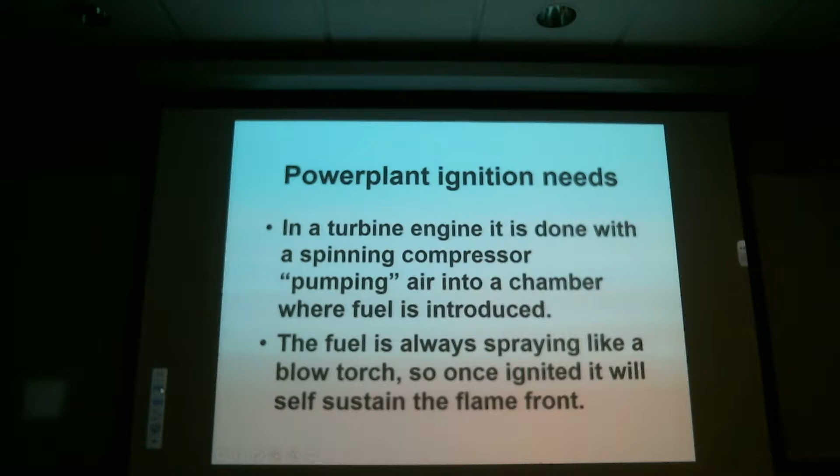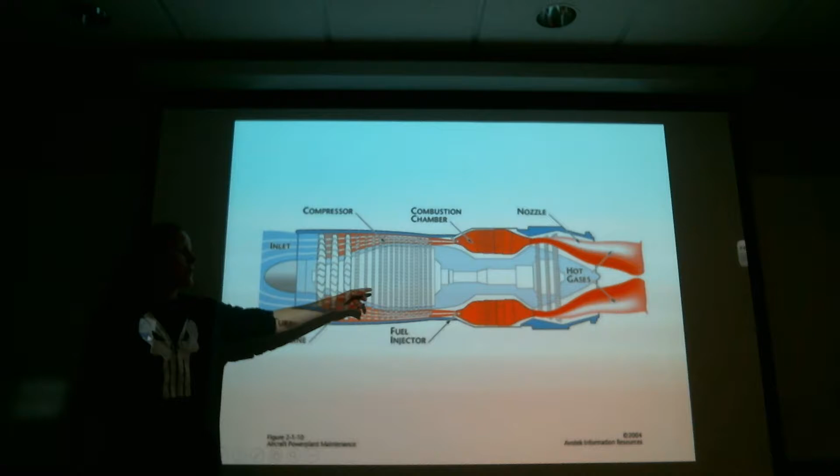Okay, ready for the next slide? Here's a picture of what we're talking about. So the compressor, what is this little guy here? What are these little guys called? Combustion chambers. So fuel injectors right here, dipping right into the combustion chamber, just like my buddy over here said before break.

So it works a little different than a recip. Obviously, there isn't valves, pistons going up and down. So everybody kind of understand and see what that is?

I think this is in the... there's a picture of this also in the power plant book. This exact picture. I know these are pictures taken from a 2004 book, but I believe they're still in the newer ones. I actually have a newer book that I've seen it in.

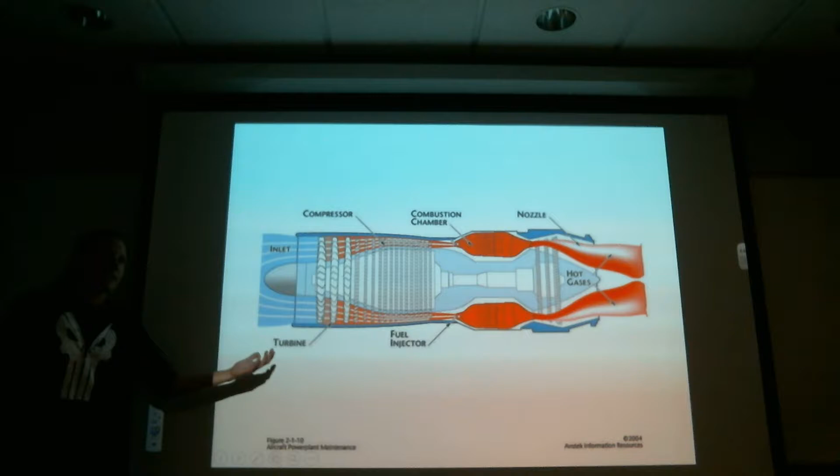And you guys will learn a lot more about turbines, obviously, in turbines class. But the main thing we're going to be talking about in this class is the igniter. So when we go through igniters and when we do those, we're usually involving turbines.

Okay? So for this class, what book would you prefer? What book would you recommend for this class? The new one or the old one?

I have to recommend the new one because that's the book that's out. I do like that green power plant book. I don't know the Glencoe one, that's older. I have the newer one here. It has just as much information, but when I'm talking about the older books, I'm talking about the AC 43.13 and stuff—they've changed those over the years. So if you have your old one from General, keep it, it's like a gold mine. That's what I'm reading from for this one.

Yeah, so the old ones are online too. But I also like having—I like touching stuff. So this is the one I'm going to be referencing in this class. And like I said, it wouldn't hurt you guys to read the ignitions part of this book. Is that one available in the bookstore? I saw it this morning, so it's available in the bookstore and online, I believe. It's cheaper on Amazon, or there's an online copy—way cheaper off the FAA site.

And I think, for the record, for what college books cost, these are nothing. I about flipped—I almost had a heart attack when I saw I had like 6 books to get for General. I was almost crying because I was on a budget, and all my books from other classes cost like $100 apiece. I can't afford $500-600. When I went to the store they said it's under $100 for all these books. So instruction manuals aren't that expensive, but they're very useful.

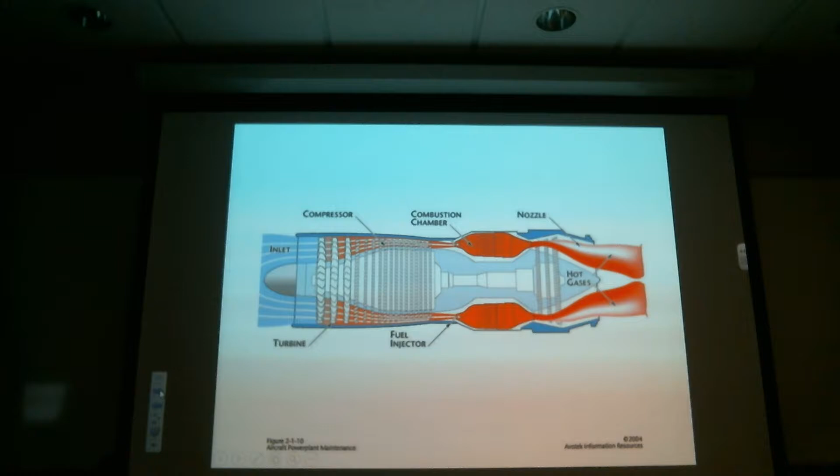So if you don't have this book, please get one. He said they're in the bookstore, and you can also get it online. Kennedy over there said so. So if it's not there—it was there at 8 o'clock this morning. Oh, now you're sliding the time, huh? Yes, when I was there. You gotta check the top shelf and the bottom shelf—there's two locations, a used location and a newer location.

In every aircraft engine, the spark must spark consistently every time when needed. So basically, it's got to work—it's got to give you the spark when you need it. What happens if it doesn't, and it's late? Does it just blow up on you or something? That's one of the things we'll talk about.

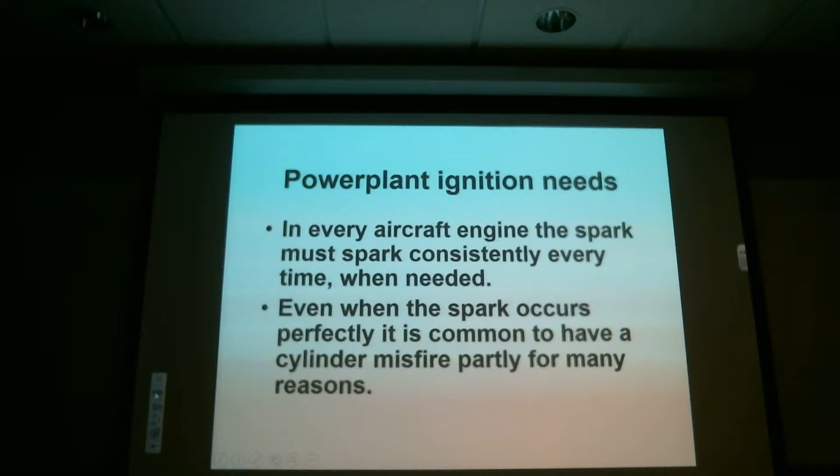Is it that we hear knocking because it becomes uneven or something? Yeah, so we'll go through detonation and pre-ignition, which are common factors if the timing is off. We're gonna talk about Pauli's magic angle—some of you said you knew what that is, right? We're gonna go through it anyway, but it's important for it to happen at that time. If it doesn't, these are some of the things that can happen, and knocking noise is one of them you'll hear. I'll show you pictures of what could happen.

Here's a good one right here. Even when the spark occurs perfectly, it is common to have a cylinder misfire, partly for many reasons, and we'll discuss those reasons. It's not like 100 reasons, but...

When you guys go into recips, you're gonna be right on top of it. You're gonna tell Lonnie, 'I don't need that stuff, I've already seen it.' I don't recommend doing that—I wouldn't either. He doesn't like it when students say they already know everything. Trust me, he'll find something you don't know.

So my guys that have had recips, what are some of the reasons it could misfire? Wrong fuel—I hope you don't have the wrong fuel in there. Pre-ignition, detonation. What about a foul spark plug? Yeah, if it's a foul spark plug it won't ignite, or if the timing's off, or if it's overheated, it could detonate.

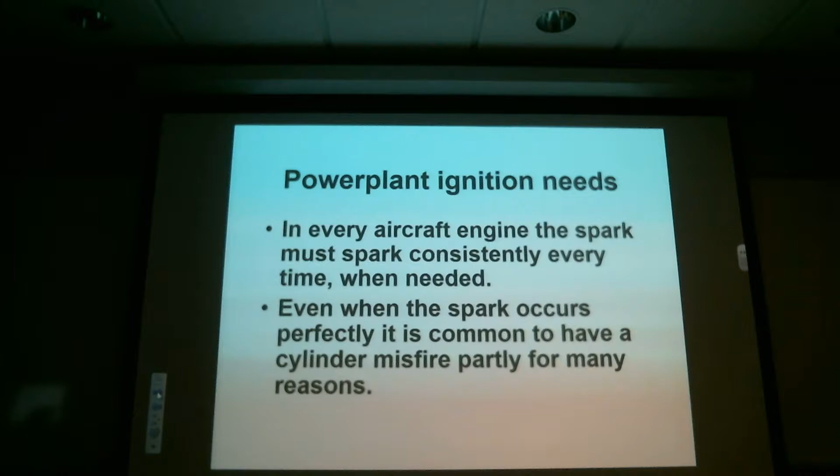Everybody kind of see that? I know it's kind of hard to visualize, but as we go through the slides, you'll get a little bit more.

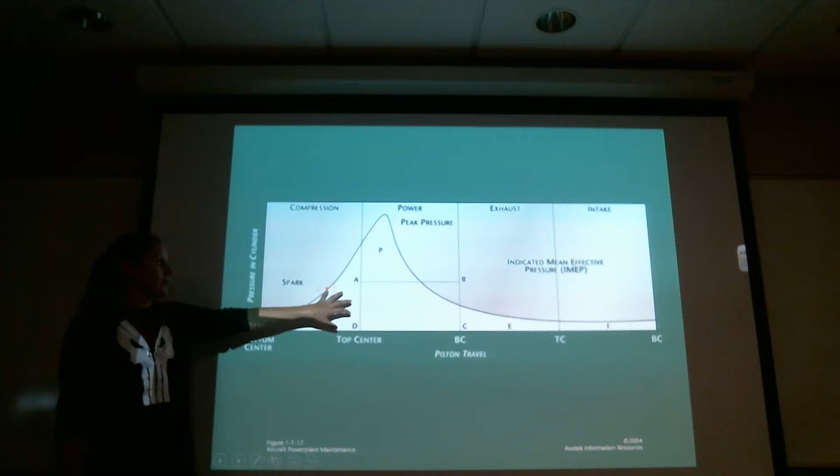So the reason why we want the spark to happen 15 degrees before top dead center - someone figured out that's when it needs to occur in these engines. They realized it's going to take time for it to get up to top dead center. Everything's moving, so you have to give it time to travel there because you want it at its peak pressure before it pushes the piston back down.

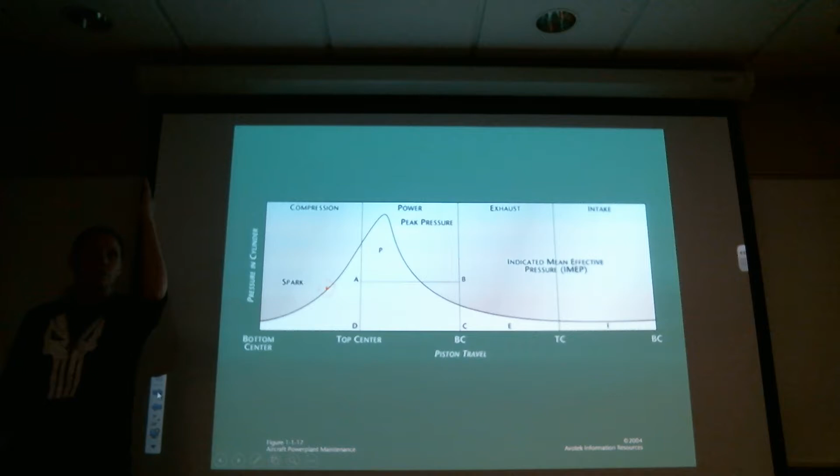And we don't want it completely at top dead center, because if you're straight up and down and I give you the most power, what's going to happen? Snap the piston rod - it's going to bend. It's not going to do anything, it's going to hit it just like hitting it down with a hammer. But when you're kind of bent like this, it's going to push it and make the rotation go around. I'll have pictures showing that.

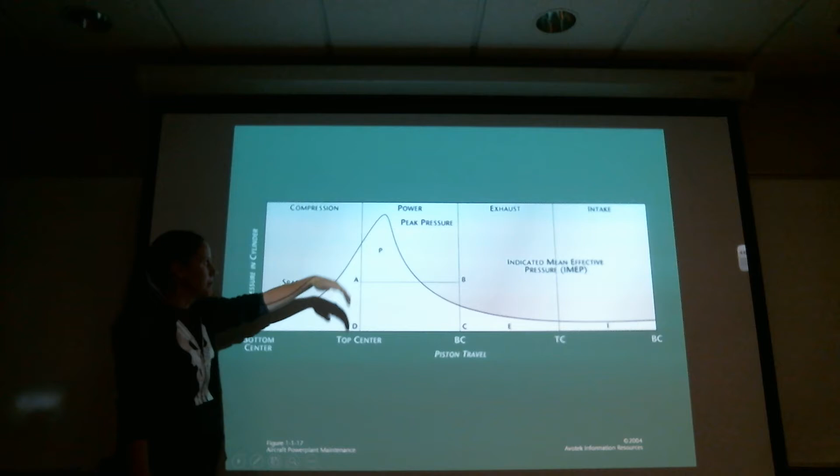This is a diagram. So when you see this in any other class, the spark comes here because it's 15 degrees before top dead center. And then also your peak of pressure happens some degrees after top dead center. The peak pressure is supposed to be like, what, 7 degrees after top dead center? Something like that.

After when is peak pressure supposed to happen - the exact degrees of crankshaft rotation? Well, it depends on the engine, but most of the time it's 25 degrees after top dead center.

You're talking about the little rod, right? The connecting rod - that's connected to the piston. So the piston's straight up and down, we don't want to ignite it right there. We don't want to hit it so pressure... you ignite it at 15 degrees, so you're going to spark at 15 degrees because the peak of pressure is going to be up here.

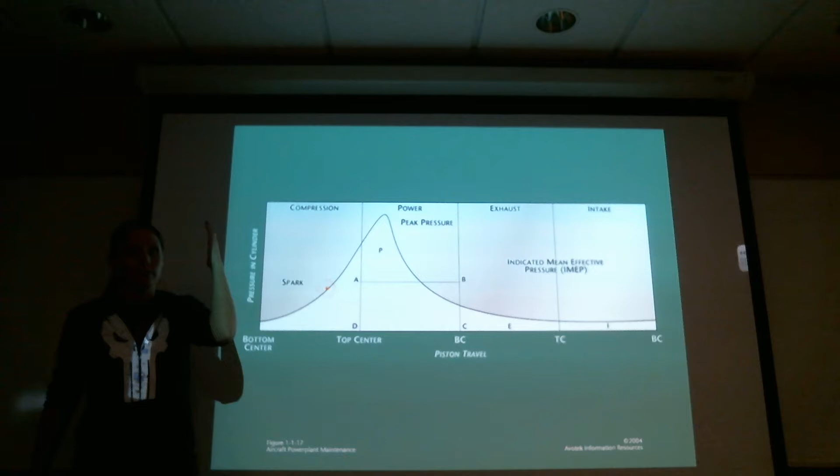So the piston's already going to go past top dead center. So if our peak of pressure was here and the ignition happened right up here, it's going to hit straight down. There's nothing it's going to go against - it's just going to take all the force. And sometimes it'll bend the connecting rod.

I actually have a picture of that. There's plenty of things it does to the piston, but I never see pictures of what it does to the connecting rod. I don't know why people don't show pictures of that. The one I think I have is actually from a car, believe it or not.

Okay, so the engine also needs sparking to occur differently at different times. RPM is the most significant factor on when to spark the fuel air. In an airplane, we're usually running close to the same RPMs all the time. In cars, you may adjust the timing, but for airplanes we're usually running at the same RPM, so we don't have to adjust timing - it's always that 15 degrees before top dead center for most engines.

Okay, so let me know when you have that written down. Everybody have that down? If you don't, please speak up, I'll wait for you. Okay, so bottom one.

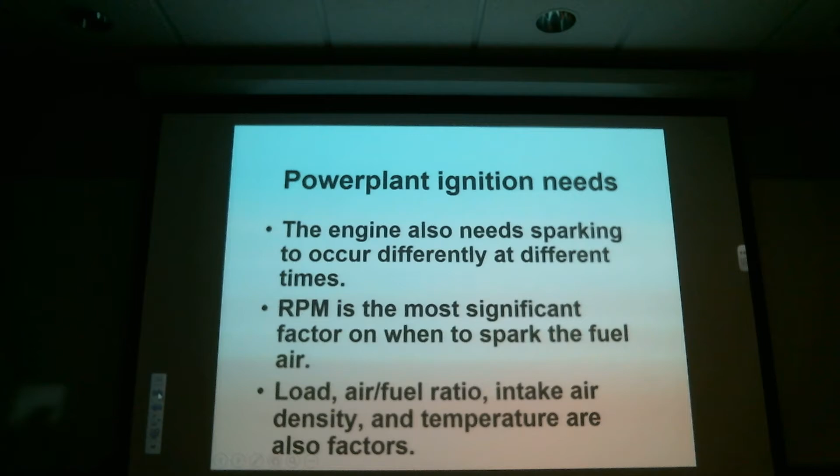And all this stuff we're going to continuously talk about throughout the course of the class. I'm hoping everybody was done because I just went to the next slide.

Okay, the rate of fuel burning stays fairly constant, about 200 feet per second. Your reciprocating engine needs to have the maximum average pressure occur at 15 degrees after top dead center - sorry, it's 15, not 25, I apologize. 200 feet per second.

But I do like that 7 number. I haven't heard 7 - I think it was in reference to like American V8s.

Muscle car. And when I think of 25 degrees after top dead center, I'm also thinking about the bigger engines, because the piston is bigger.

So the bigger ones, the bigger the piston diameter, the further degrees are going to be passed. Because 25 degrees after top dead center is something that sticks in my head. 15 is not usually.

Is that 200 feet per second? Yes.

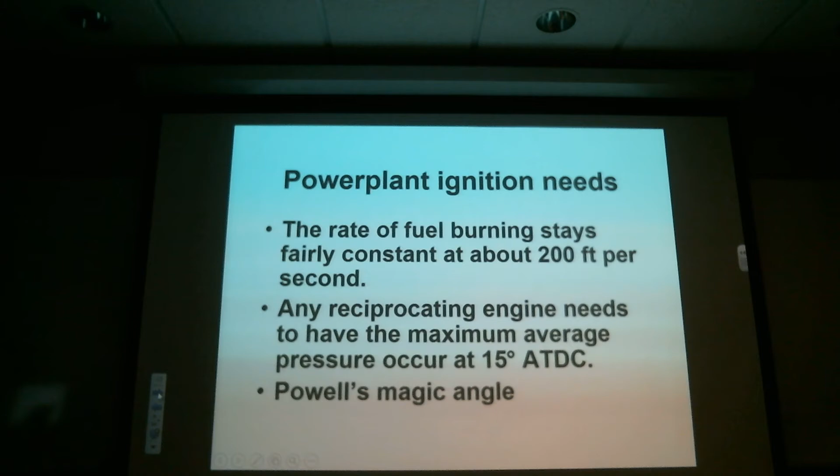Yep, everybody got that? Powell's magic angle. This guy's name was Powell. Okay, so here's another picture of it.

So what do we say, 15 degrees after top dead center is when it's going to happen. So most of the time the spark, I'm thinking the opposite, the spark would be 25 degrees before top dead center. So 25, 15.

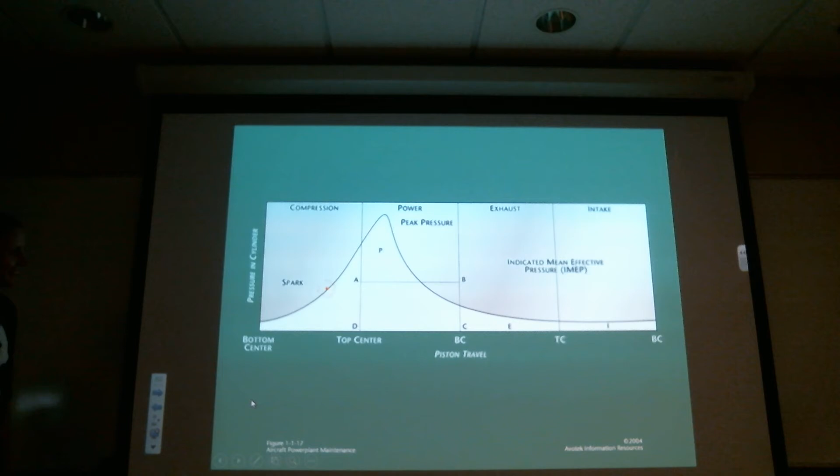And here I was just telling you guys that numbers was my thing. Right, numbers on your... yeah, numbers just not. Yeah, I knew it was somebody's birthday, I just didn't know it was your birthday.

So same thing I was talking about before. Spark happens here, top dead center. Peak of pressure is going to be up here. That's going to be our magic angle.

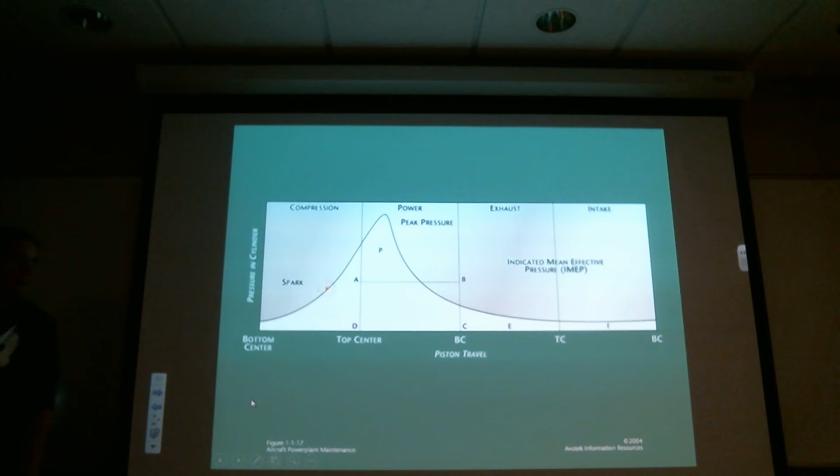Like I said, the reason why it happens here and not directly here is we got to factor in the engine's turning. It's got to give itself time. This thing happens instantly, it's quick.

It's really, really fast. It may seem slow looking at it at this point, but they're slowing it down for you. This happens within milliseconds.

Also, the reason why you have to start it so far in advance is because you have to wait for the flame front to travel from the spark plug and then eventually reach peak cylinder pressure.

Right, and so in the bigger ones, we have 2 spark plugs in there, right? So part of the reason we have 2 spark plugs is for redundancy, but also for bigger cylinders it's so they both fire and can get the flame there quicker.

Yeah, because if you only had one spark plug in a 6 or 7 inch diameter piston or bigger, the flame front can't travel to the other side of the cylinder fast enough to actually make peak cylinder pressure. It's just inefficient as all get out.

Did you guys all hear that? You guys look really live. We're gonna take lunch here very shortly, I promise.

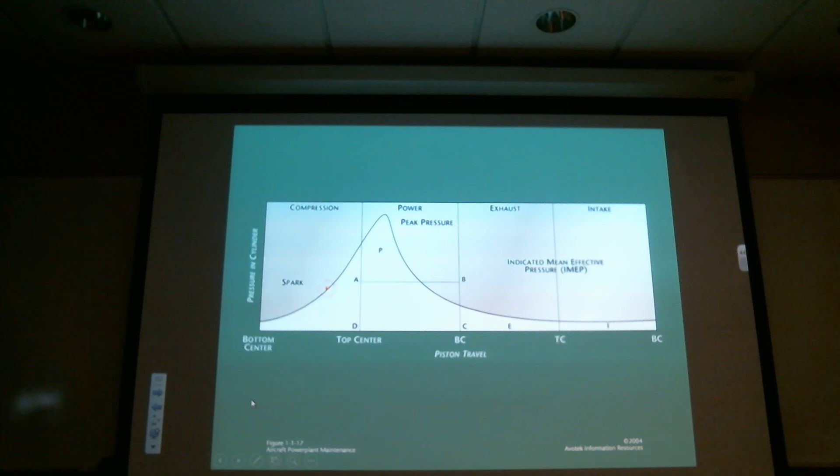And now 1 minute past here. But I kind of want to get a little bit further into the slides because I still have 20 more slides to go before I put you guys in lab. So we're probably only going to spend, if we spend any time in lab, a short amount of time.

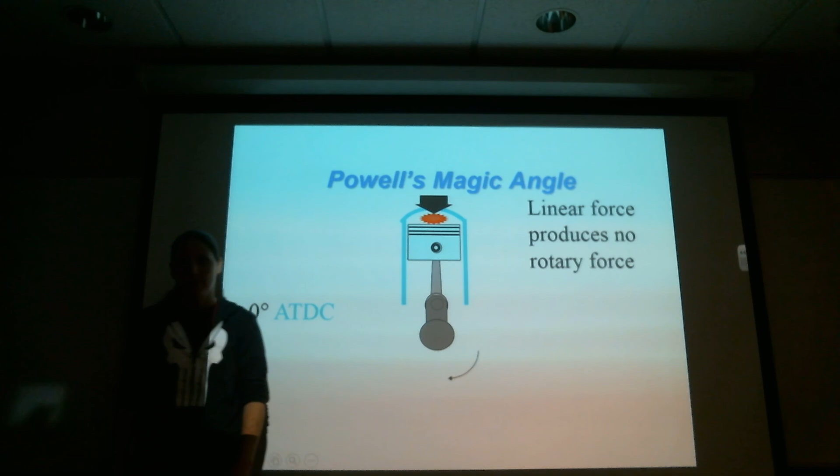It's kind of a visual aid here. So does everybody kind of see that?

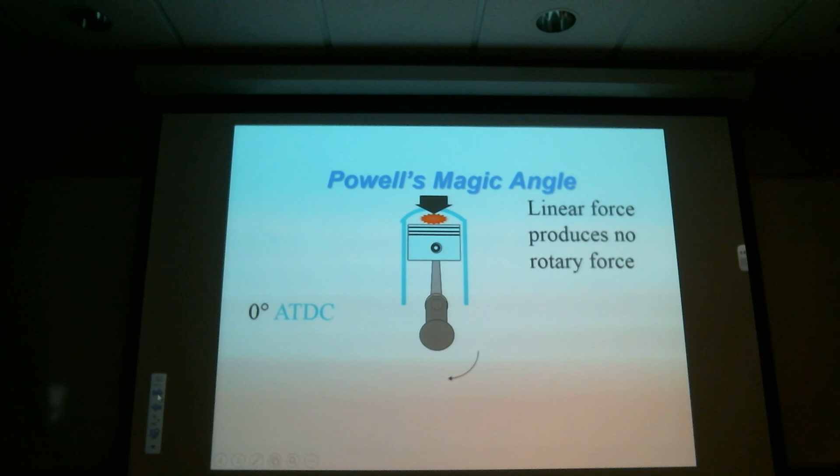Everybody get down what they wanted off that slide?

So now you're visually seeing it. So now we got a little bend in here, right?

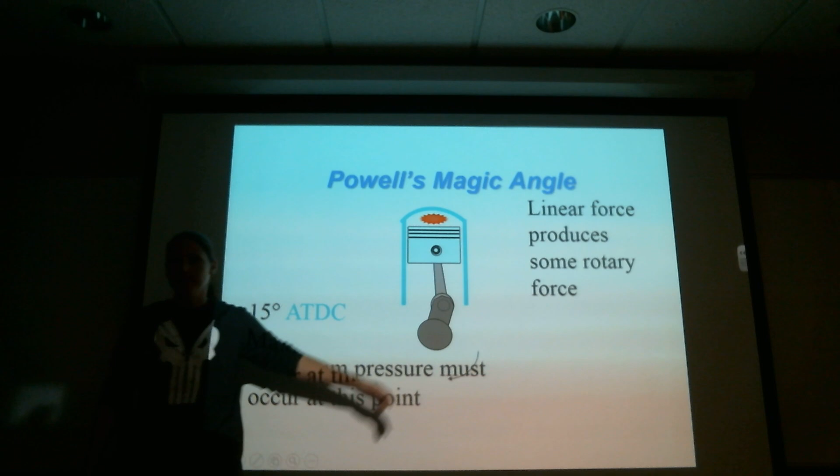So maximum pressure must occur at this point. Like I said, it was discovered a long time ago on this particular angle.

Who discovered it? Powell did with his buddies. They figured if it happens at this point, it will give me the maximum pressure I need to make it spin all the way around, the most efficient I can make the engine.

Does everybody get that? It's pretty easy when you start visually seeing it, right?